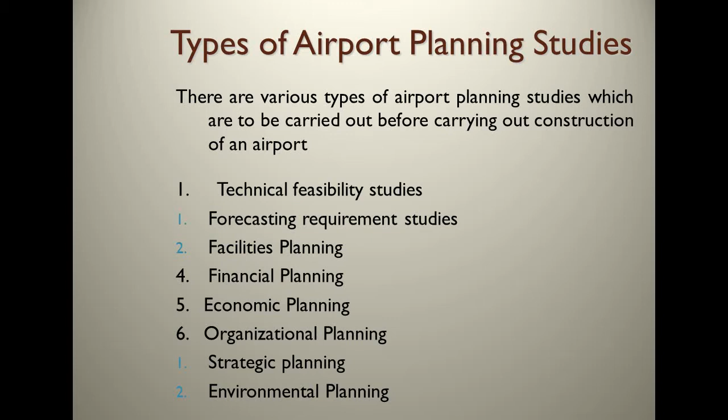Engineering and technical planning studies. These studies involve various technical aspects such as approach zone survey, drainage, meteorological survey, natural resource survey, soil survey, topographical, traffic surveys, etc.

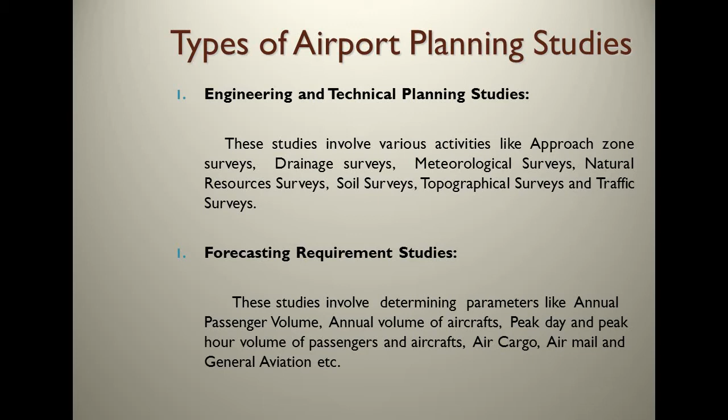Forecasting requirement studies. These studies involve determining parameters like annual passenger volume, annual volume of aircraft, peak day and peak hour volume of passengers and aircraft, air cargo, air mail and general aviation, etc.

Facilities planning. This focuses on future needs of airfield infrastructure such as extension of runway, taxiway, aircraft parking facilities, navigation system, lighting, terminal buildings, etc.

Financial planning. This is concerned with predicting future revenues and expenses, budgeting resources and planning for financial assistance through grant programs, bond issues or private investment.

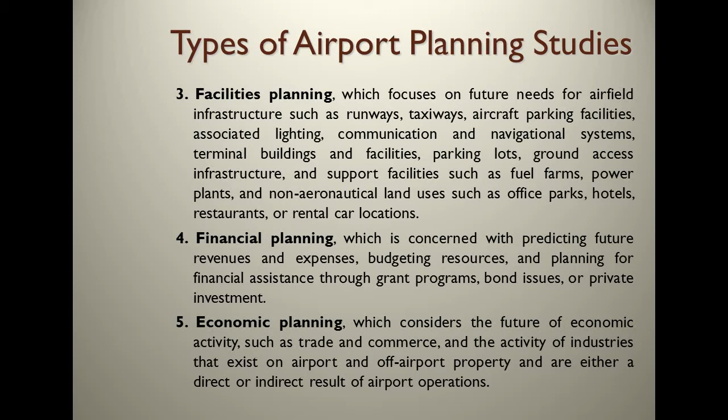Economic planning considers the future of economic activity such as trade and commerce and activity of industries that exist on the airport and off airport property and are either a direct or indirect result of airport operations.

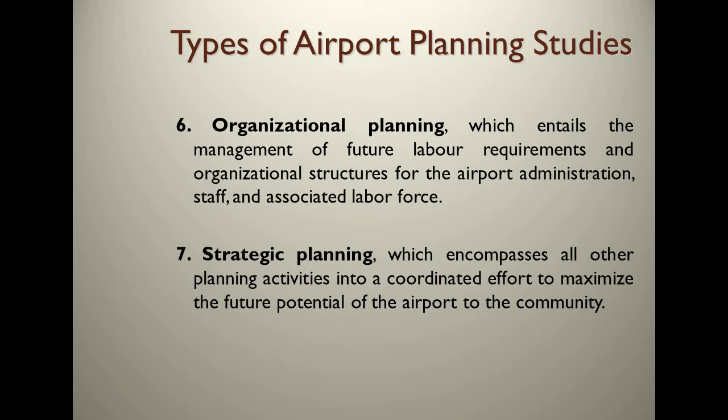Organizational planning includes the management of future labor requirements and organizational structures for the airport administration, staff and associated labor force. Strategic planning encompasses all other planning activities into a coordinated effort to maximize the future potential of the airport to the community.

Environmental planning concentrates on maintaining or improving existing environmental conditions in the face of changes in future airport activity. It includes land use planning, noise mitigation, wetland reclamation and wildlife preservation.

The environmental factors must be carefully considered in the development of a new airport or the expansion of an existing one. In this connection, the following 3 studies were made to assist the project authorities in planning the airport: environmental impact assessment, environmental impact statement and environmental management plan.

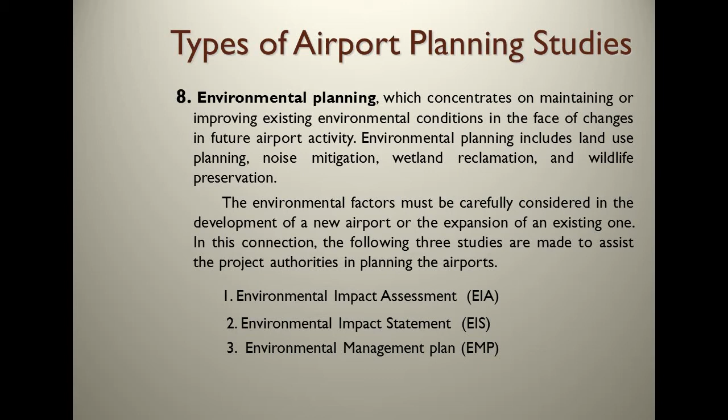Forecasting in aviation and airport planning. So we already have seen this, such as the volume of passengers, volume of aircraft, air cargo, mail, aviation, etc. The different components of the airport are runway, terminal building, apron, taxiway, aircraft stand, hangar, control tower, parking.

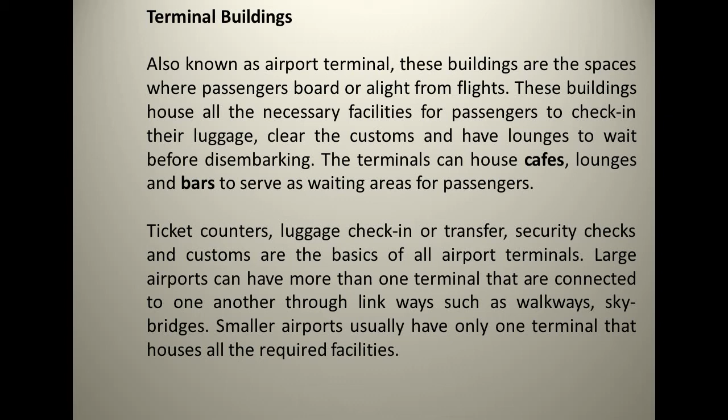Aprons. These are the areas where the aircraft are parked, unloaded, refueled or boarded. They are sometimes called ramps. They vary in size. By area they may hold 5 or 10 small planes, or even larger areas for major airports.

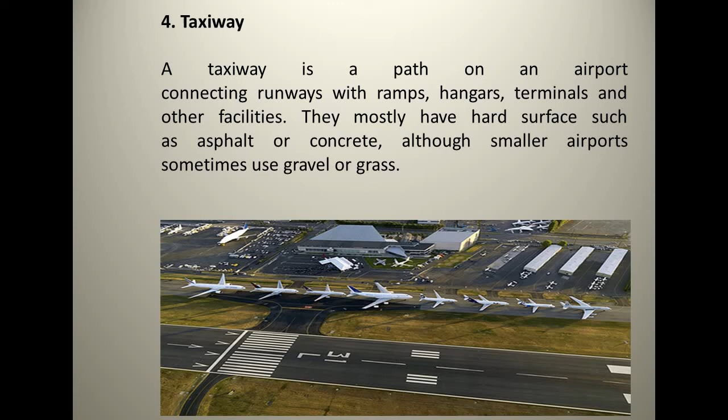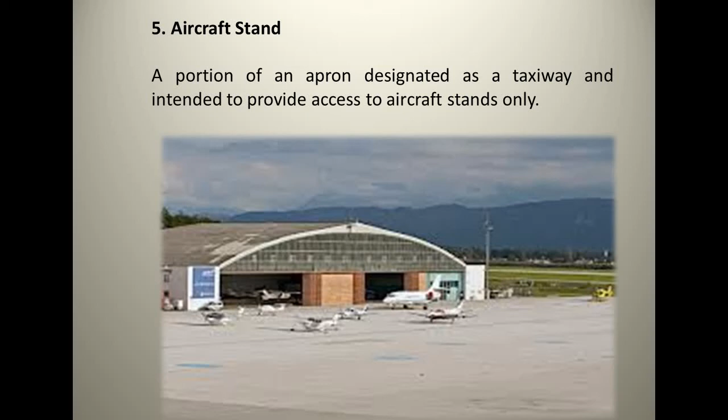Taxiway. Taxiway is a path on the airport connecting runway with aprons, hangars, terminals and other facilities. They mostly have hard surface such as asphalt or concrete, although smaller airports sometimes use gravel or grass. Aircraft stand is a designated portion of an apron intended to provide access to aircraft stands only.

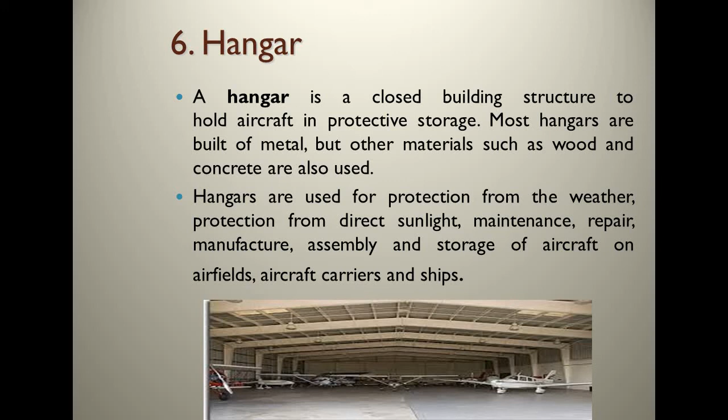Hangar. Hangar is a closed building to hold aircraft in protective storage. Hangars are used for protection from the weather, that is from direct sunlight, and all the maintenance, repair work, manufacturing, assembly and storage of aircraft are all done in this hangar.

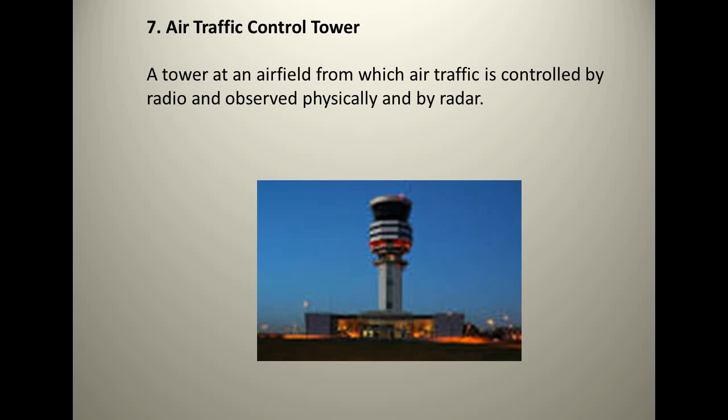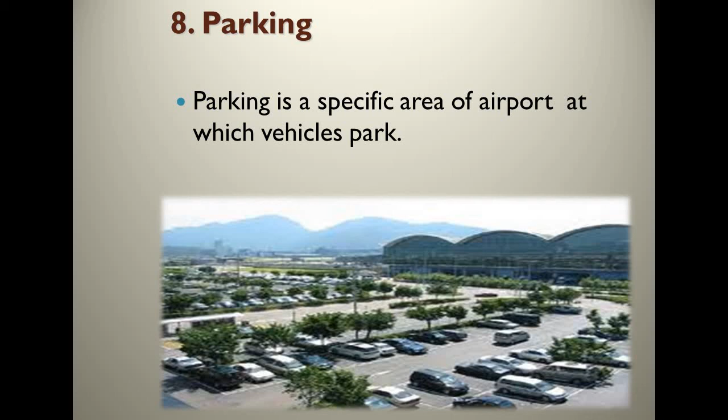Control tower. A tower at an airfield from which air traffic is controlled by radio and observed physically and by radar. Parking is a specific area of an airport at which vehicles are parked, such as passenger vehicles.

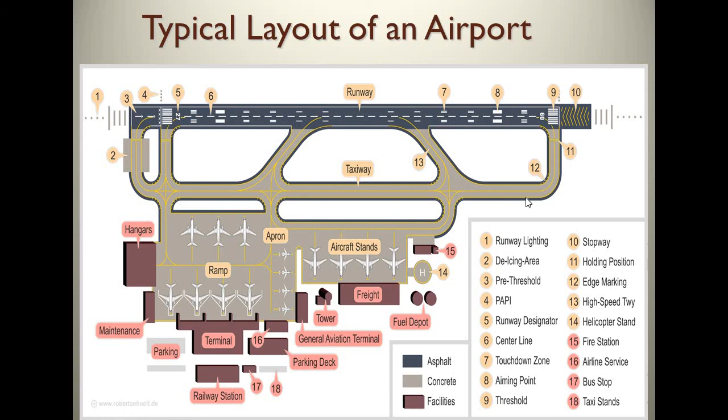So this is hangar where repair or maintenance work of aircraft is done. So these are the pathways. These are called taxiways, which connect runway with other parts of the airport. So all this grey colored path indicates taxiways. Thank you.